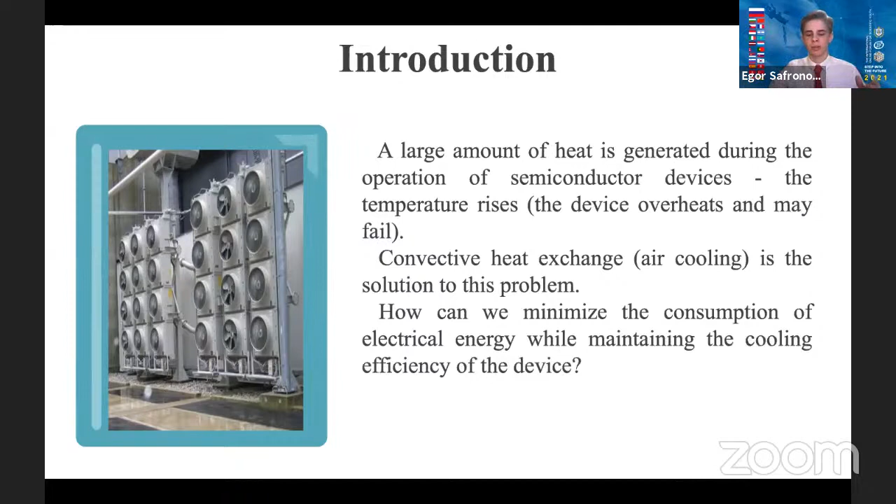The issue of energy saving in increasing the efficiency of the industry remains relevant to this day. To date, various design schemes of heat exchange have been developed for use in heating systems and utilization of air heat. Since 2010, the Russian Federation has accepted a state program for energy conservation and efficiency improvement, which will reduce the energy intensity of the Russian Federation gross domestic product. This program remains relevant at the moment.

Besides, the problems of power supply and cooling systems in corporate data centers today are faced not only by technical specialists and administration, but also by ordinary corporate users, representatives of small businesses and industry. The reason for these problems is the mismatch between the widespread explosive growth in the number of servers and storage systems with their ever-increasing performance, as well as the limited ability to implement cost-effective solutions in most data centers. Also, the question arose of the need to introduce efficient cooling systems in the industry.

Metallurgy is a great example for it. In the course of our work, the following hypothesis was put forward: the efficiency of intensification of heat exchange processes in a gas flow depends on the optimally selected blowing speed. To confirm or refute this hypothesis, we set the goal of developing an experimental setup for measuring the change in the temperature of a heated body from the blowing speed.

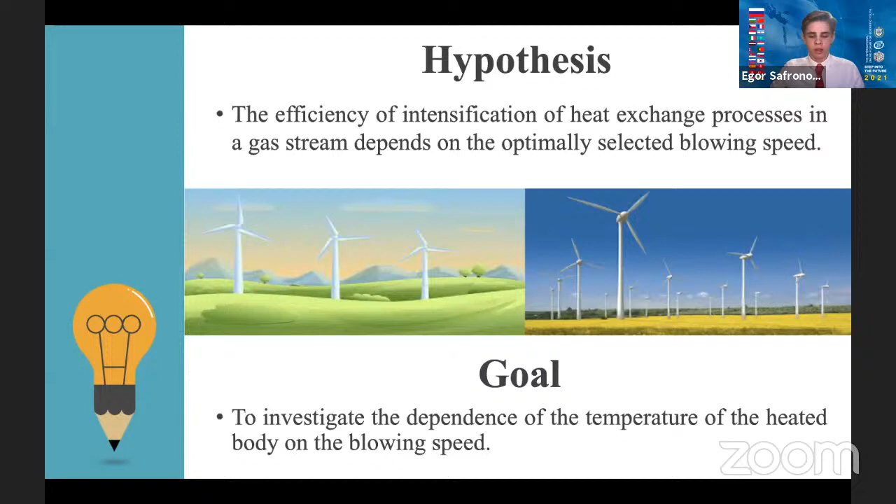To achieve this goal, we need to solve the following series of objectives. These include the creation of an experimental setup for measuring the change in the temperature of a heated body from the blowing speed, as well as justification of the possibility of applying the acquired knowledge in practice.

Heat transfer is the process of transferring heat, that is the exchange of energy. There are three types of heat transfer in total: thermal conductivity, which is a heat transfer from more heated areas of solids to less heated ones; convection, heat transfer by jets of liquids or gases; and radiation, heat transfer by means of electromagnetic waves.

The types of heat transfer without mass transfer include thermal conductivity and radiation, and heat transfer with mass transfer includes natural convection and forced airflow, which is also called forced convection. Natural convection occurs spontaneously in a substance when it is unevenly heated, while during forced convection, the material movement is due to the action of external forces, such as pump, fan blades, etc.

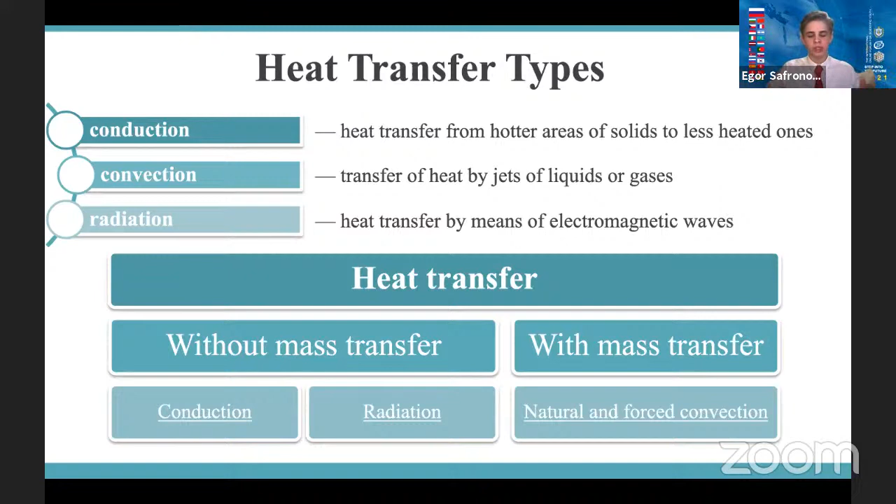Since our study refers to the intensification of heat transfer by means of blowing, let us dwell in more detail on the consideration of the theory of forced convection.

The heat transfer coefficient increases with an increase in the velocity of the medium and during the transition from a laminar to a turbulent regime of motion in connection with the intensification of convective transfer. The heat transfer coefficient is also higher for those media with a higher thermal conductivity coefficient. In most cases encountered in practice, the heat transfer coefficient is determined experimentally.

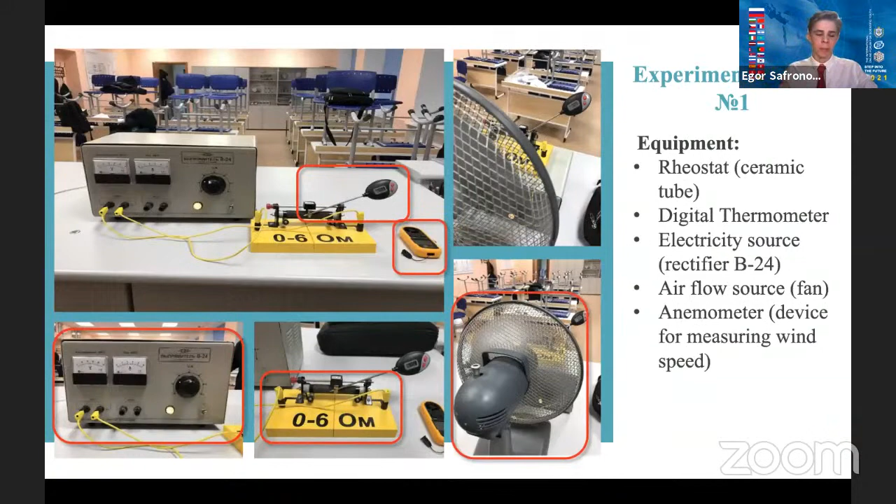First of all, we measured the room temperature equal to 22 degrees. Then we set a constant current supply to the electricity source equal to 7 volts, 7 watts, and 1 ampere.

Regardless of the increase in the blowing speed, the body, taking into account the difference in room temperature, will still be cooled to a minimum of 7 degrees Celsius. Therefore, the optimal speed for this configuration will be 4 to 5 meters per second.

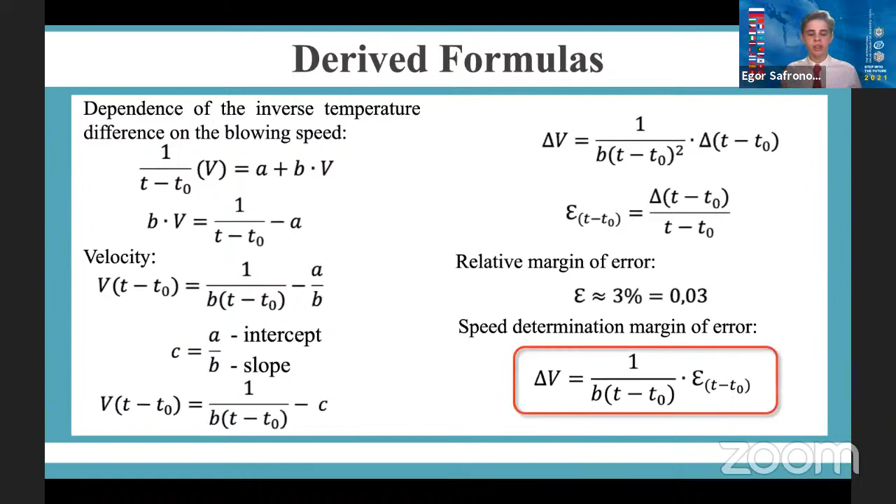Now let's derive the formulas. By transforming the formula obtained from the graph for the dependence of the inverse temperature difference on the blowing speed, and deriving the formula for the velocity, we were able to derive a formula for determining the speed margin of error.

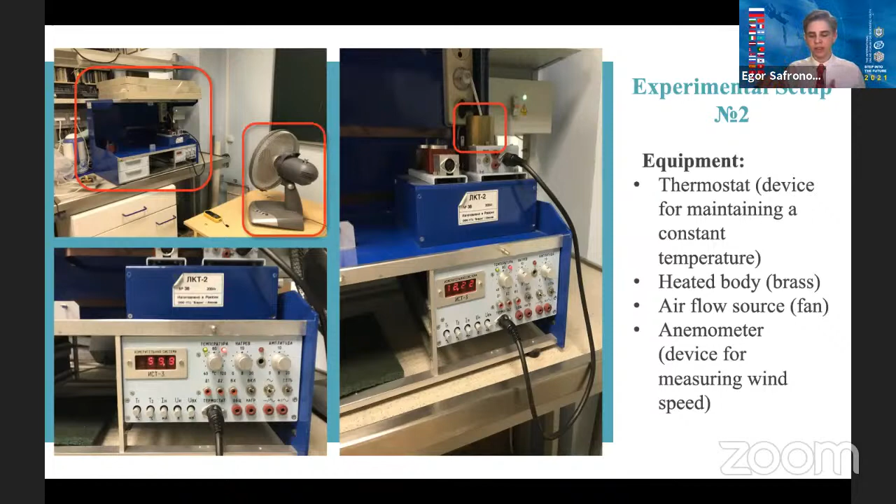The second experiment consisted of thermostating. To create the second setup, we needed a thermostat, a device for maintaining a constant body temperature, a heated body. Based on the heat conducting qualities of metals, we chose brass, a source of airflow, and an anemometer.

As a result, this gives us that for a power equal to 12 watts, the optimal blowing speed will be approximately 2.5 meters per second.

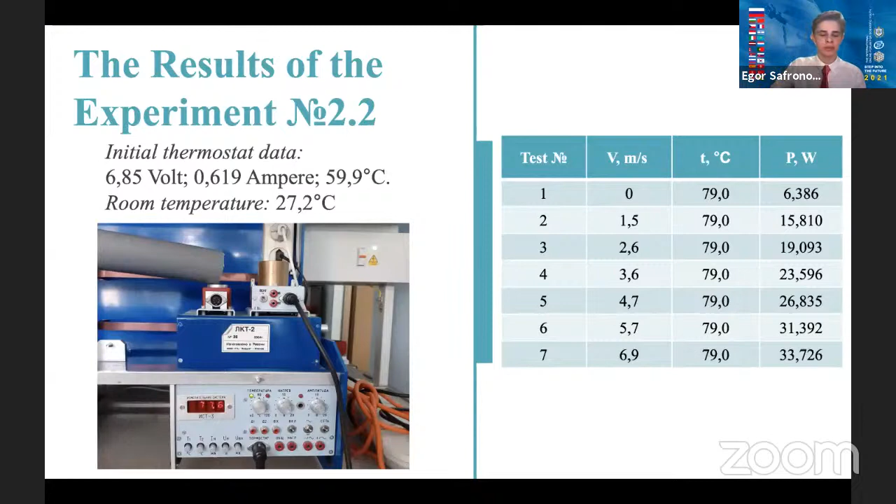Changing the temperature parameters to higher ones, a similar experiment was carried out, the results of which are presented in the table. Based on its results, a graph was also drawn up and a linear dependence of the power on the blowing speed was obtained, by which we can also easily determine the optimal speed for a given power.

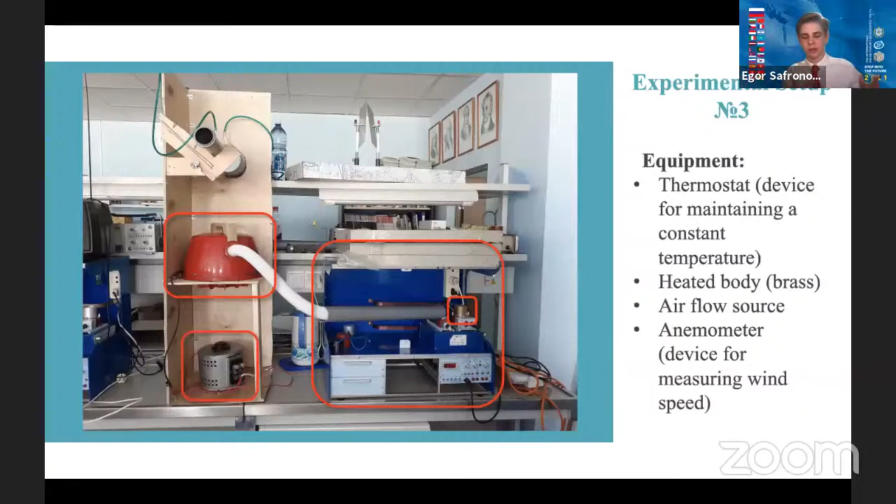Experimental setup number 3 consisted of a thermostat, a heated body, a source of airflow, and an anemometer. We constructed a separate setup for it, consisting of a vacuum cleaner operating on blowing, a linear auto transformer for adjusting the wind speed, and an anemometer. The principle of this experiment was similar to the first one.

We set constant power on the thermostat and recorded the change in body temperature under the influence of airflows of different speeds. The results are presented in the table, where we also noticed that after the 7th test, the minimum temperature changes insignificantly.

Next, we presented the results on the inverse exponential dependence of the temperature difference on the blowing speed, from which we can conclude that the optimal speed will be 6 to 7 meters per second.

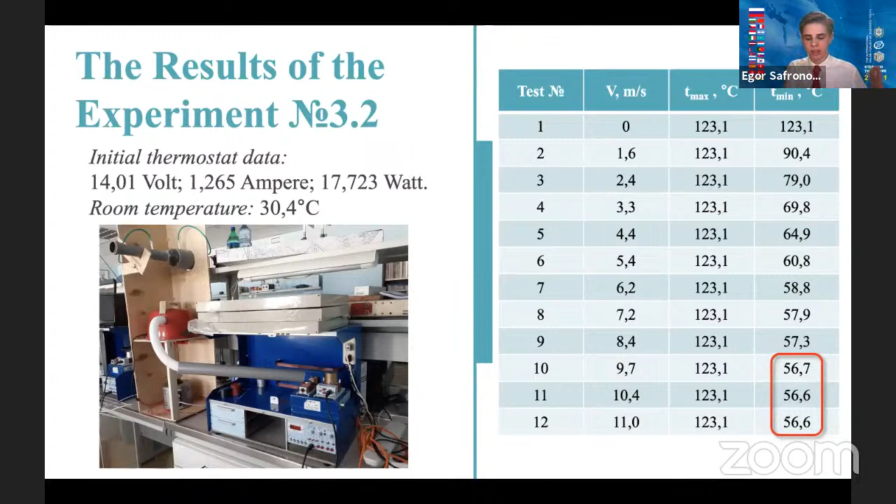The final experiment was carried out according to the same principle, while the temperature was significantly higher, 123 degrees Celsius. The results are presented in the table. However, in this experiment, only after the 10th test did the minimum temperature begin to drop slightly, and then completely stopped decreasing. From the graph, you can see that the optimal speed will be 9 to 10 meters per second. Consequently, the higher the temperature of the heated body, the higher its optimal blowing speed will be.

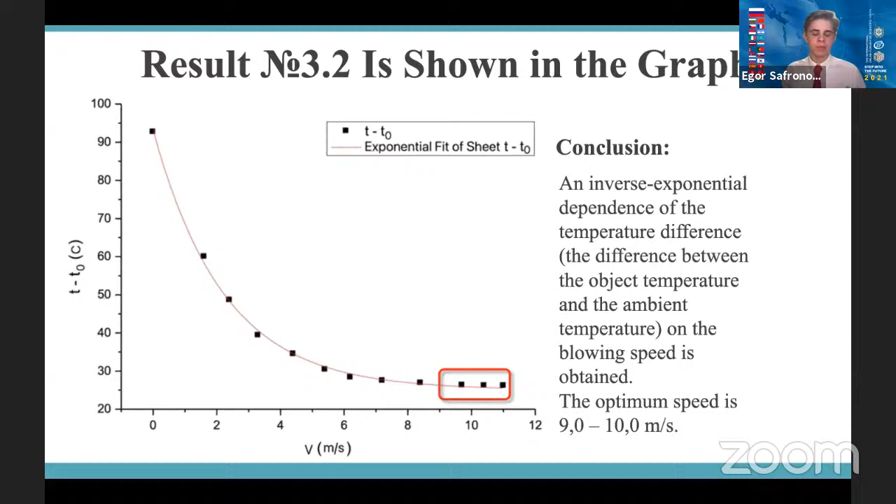Based on the results of the experiments carried out, we can safely say that the hypothesis put forward by us has been confirmed. Each of these configurations has its own optimum airflow speed. With a little effort, we can calculate this speed in order to use electrical energy efficiently without unnecessary waste.

Based on the knowledge gained, the prospects for our project are to create our own cooling unit, which will automatically adjust the blowing speed to the consumed power in order to maintain energy efficiency, as well as to compare this method of heat transfer with other current ones, such as water cooling, for example.

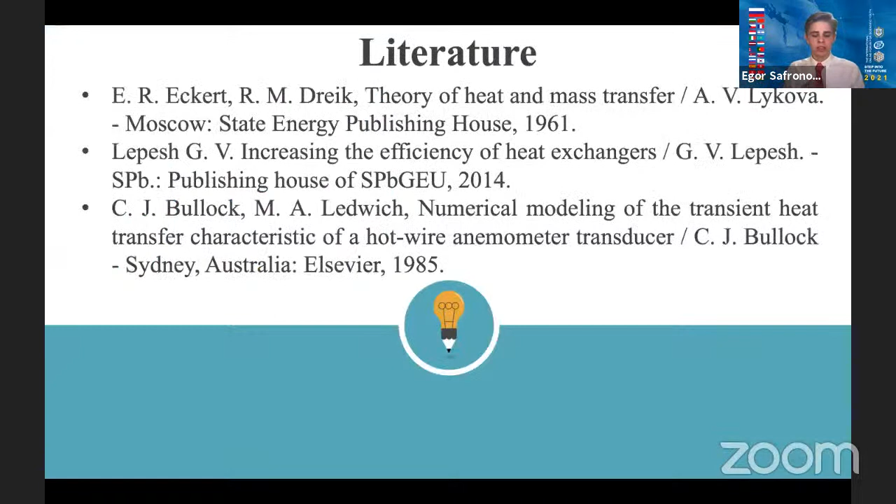Based on the results of our research and the objectives set, we made the following conclusions, presented on the slide. During our research, we used the following scientific literature. Thank you for your attention.

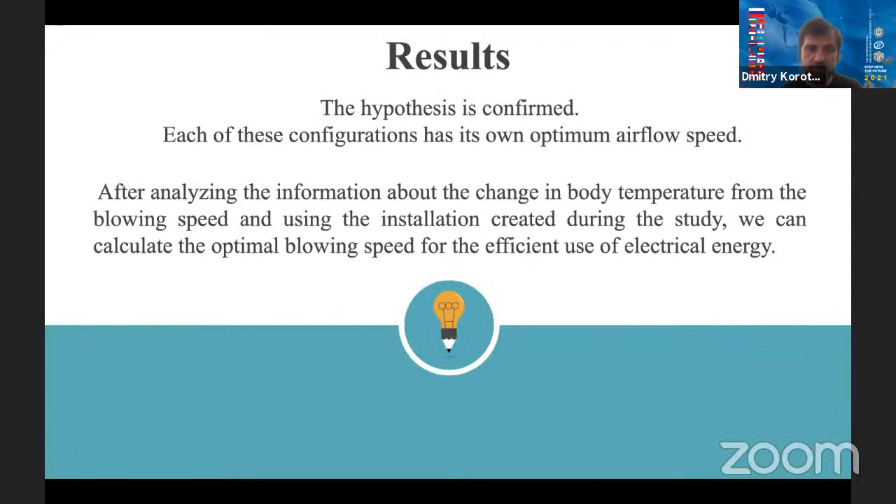Any more questions? Excuse me, could you show the slide with the results again? Yes. This one? No. With the list - conclusions, you mean? Conclusions, yes. All right, yeah.

And what do you think, is the wind or water cooling system better? As I see it, the wind cooling system is better, but I cannot tell it right away because we didn't compare them. This is, as I told you, the prospect - we are going to compare them and define which will be better for usage. Why do you think so? Because the water cooling system is hard to maintain compared to the air one.

No, by physics - about physics. Well, why do you say that the air cooling system should be more effective than, for example, a water cooling system? In terms of physics, as we understood, the convective method is a method with mass transfer. The mass from the blowing speed from the fan, for example, will cool our body better because it's easier to do for it, I mean.

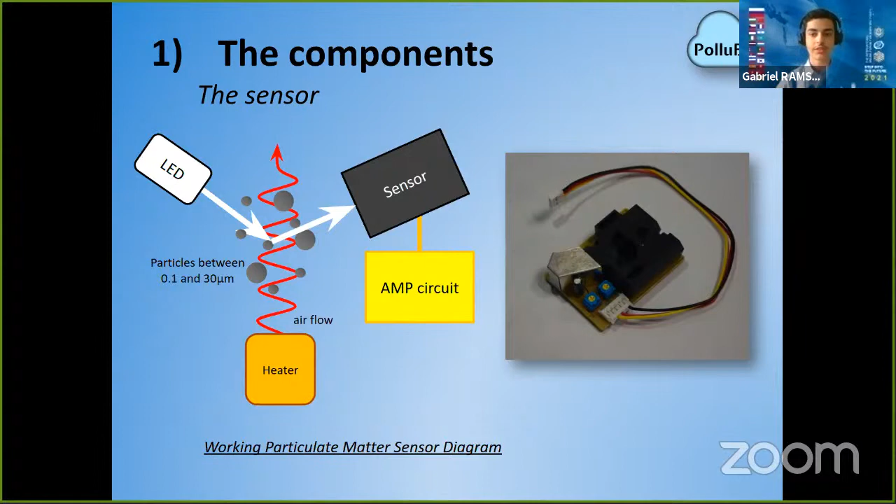Now the sensor. At first we wanted to use a NOx sensor. NOx means nitrogen oxide, gases with direct effect on health, but it needs time to warm up and the data are quite hard to use. So we changed to a dust sensor that measures particles between 0.1 micrometers and 30 micrometers.

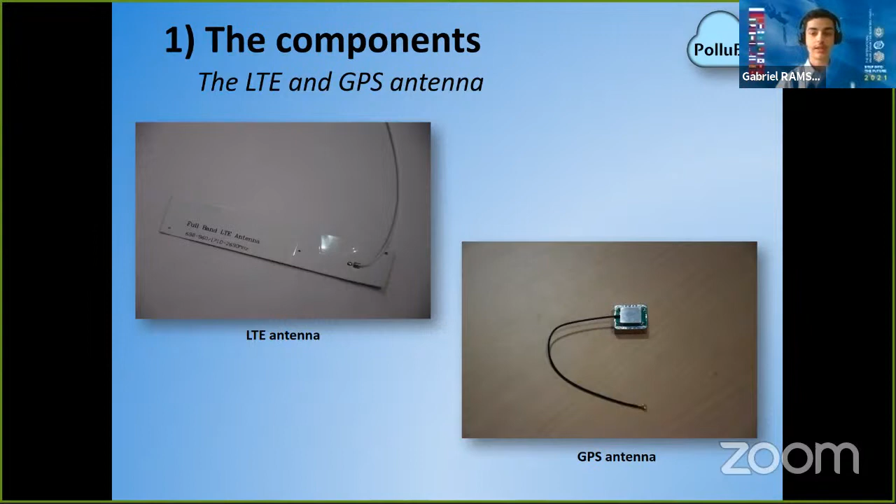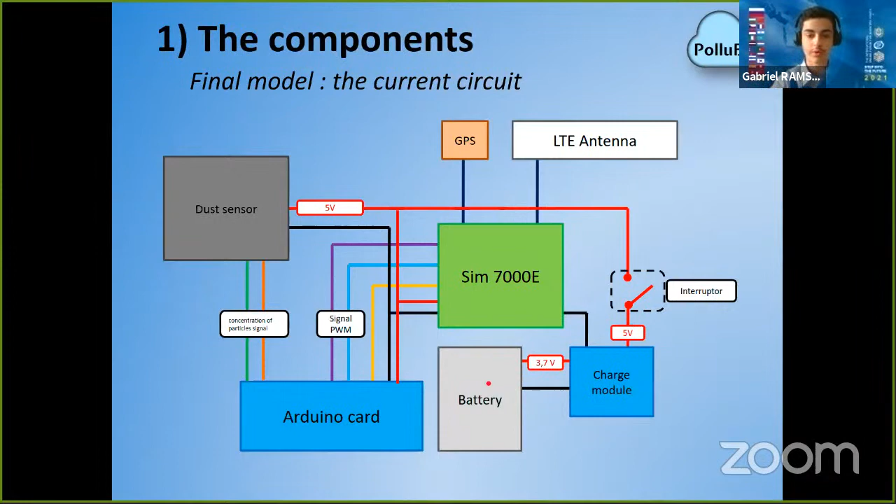Then we have the LTE and GPS antennas that are required to send the data and get the GPS localization. Here we can see our final circuit. We can observe that we also have a battery to power the circuits, and a SIM module to send the data.

Now we have all the components. We need to develop a program to use them. The Arduino program has changed a lot, but today this is what it looks like. We first define libraries, pins, and variables. Then we have the setup function that simply starts the circuit.

After that, the most important part is the loop, where we get the GPS localization. We measure the pollution of particles between 1 micrometer and 2.5 micrometers. We convert the data since the sensor does not use a classic unit of concentration, and we must convert it into parts per million, ppm. Finally, we send the data to the server at the end of the code.

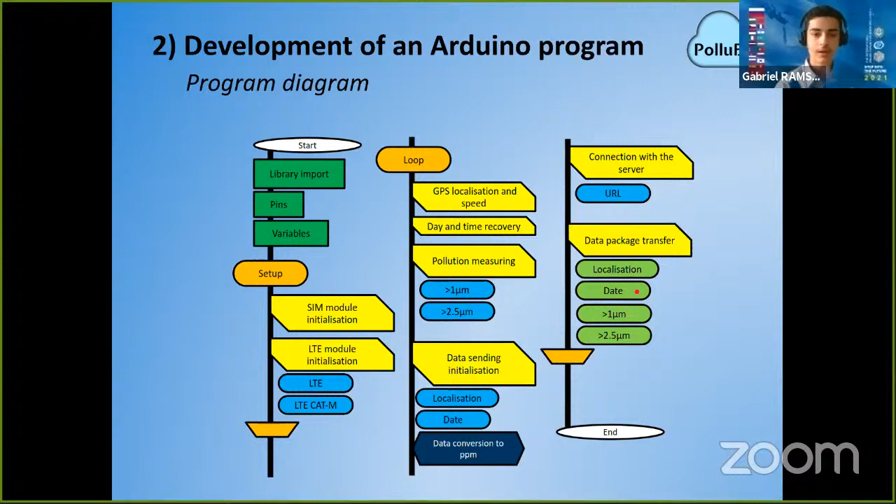Now we can measure the pollution. We need to put our components on a bike. At the beginning, the case was just a box that contained the components, and it was not really aesthetic. So we designed another case with the shape of a cloud that reminds us of the pollution topic. But as you can see, it's really big and it's quite impossible to put on a bike.

Therefore, after much research, we developed the current case that keeps the shape of a cloud, but can easily be put on a bike.

Now we are able to get information about the pollution in the streets. We need to inform people about that. We are currently using dots on a map. The color of the dots is fixed between green and red, according to the concentration of particulate matter and the air pollution scale. It's also important to know that a Polybike sends the data corresponding to a dot every 30 seconds.

But we still have a problem: the background map is supported by Google Maps, and we would need to pay for it if we use it beyond personal purposes. Therefore, we changed to an open source map called OpenStreetMap.

With our 4 Polybikes, we have succeeded in getting a lot of data. Today it's more than 50,000 lines of data, corresponding to more than 2,500 kilometers on bikes. And for this, we have done many tests.

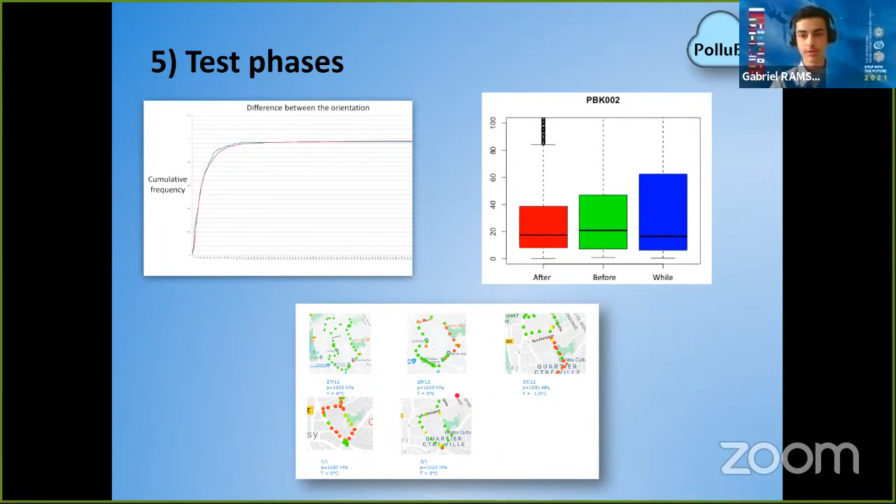We have done many tests, such as the Kolmogorov-Smirnov test, which allows us to show that the orientation of the Polybike does not matter. We are also able to compare our data, such as before, during, or after the lockdown, or according to the weather. Moreover, the tests allow us to make improvements, such as adding a condenser or moving the antennas further away.

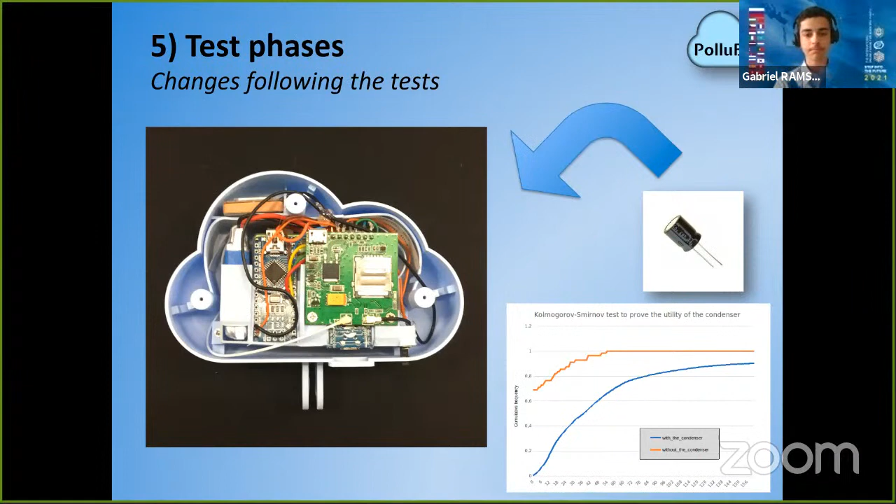Now our next objective is to increase the number of Polybikes in order to cover the whole city of Massy. But if we have a lot of Polybikes, that could create a real mess with too many dots. Therefore, we need to refresh the map. But the question still is, what is the best delay to refresh the map?

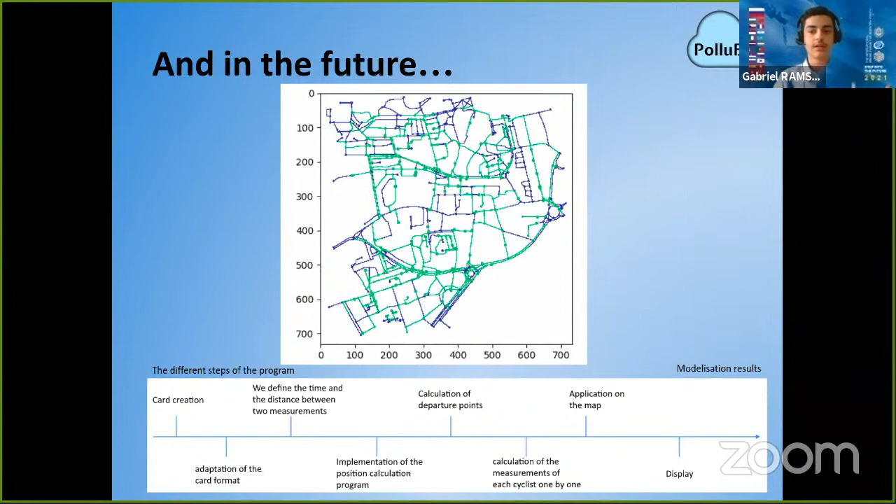So we built a Python code that models the movement of 100 Polybikes in the city of Massy. This program showed that the best delay to refresh the map is 15 minutes.

But we also observed that the colored dots on the map weren't really practical, so we thought about a way to give directly to the user the best itineraries in terms of pollution and distance. To do so, we first represented the city as an Excel table, with each cell representing a street with a pollution score. Here we have put 1, 2, 3, but it could be 1, 5, 9 - we need to fix it.

After that, we thought about different itineraries, and we showed the best one depending on the cost, which is the sum of the pollution score of each street traveled. But we needed a code if we wanted to use that instead of dots.

Consequently, we built a Python code that uses the Dijkstra algorithm with a matrix. We recover the matrix from OpenStreetMap, and we add the pollution into our calculation with the previous work.

We can give the user the best itineraries. All in all, we have succeeded in building a working device that can measure the air quality in the cities and make people aware of the best itineraries to achieve their travel. Now we want to find someone in the Paris-Saclay cluster, or maybe a startup company, that could take care of the industrialization and distribution of the polybike. And we hope to see a lot of polybikes in our cities one day. Thank you for listening to me.

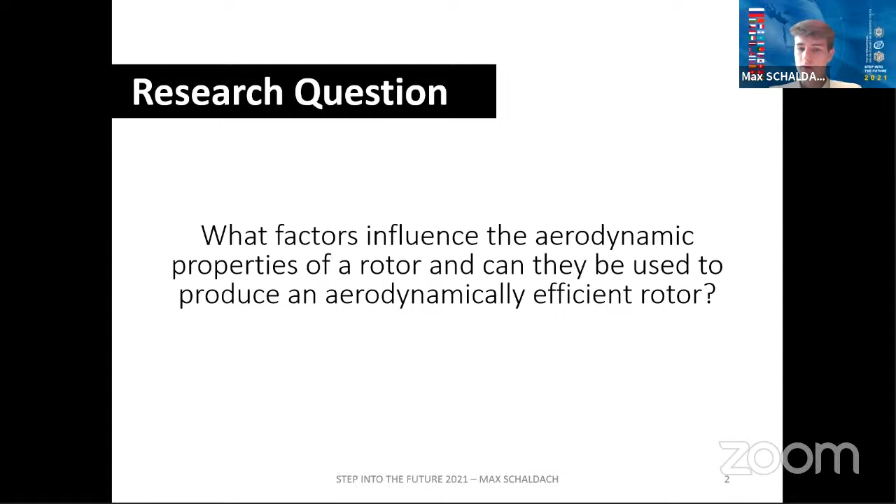To come to the answer to that question, I based my research process upon the laws of the propeller theory by Betz and Schmitz. That theory contains a fundamental idea which states that an ideal rotor has a homogeneous distribution of the lift force acting upon it. Why is that so important?

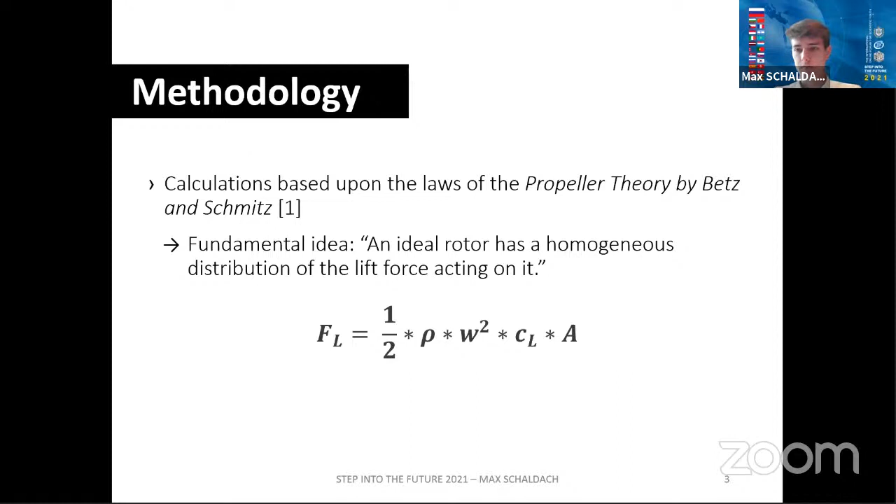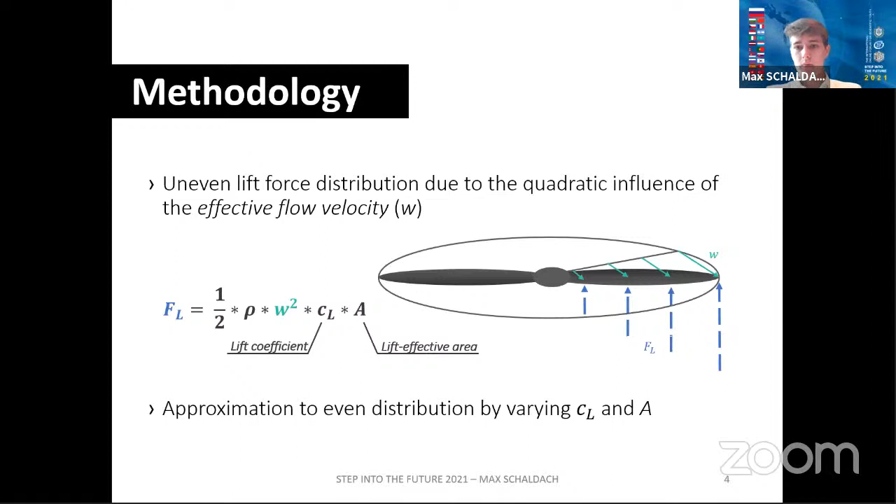However, looking again at the lift equation, we see two other parameters we could potentially vary: the lift coefficient CL and the lift effective area A. By varying them, I was able to approximate a more even distribution of the lift force. The first step was to choose suited airfoils, because varying the airfoils varies the lift coefficients. So using different airfoils for different parts of the rotor enables us to achieve a more homogeneous distribution of the lift force upon a rotor blade.

I used 3 different airfoils in total that I extracted from a public database called airfoils.de, and then exported their airfoil coordinates into Excel, where I modified them using the parameter called airfoil depth L. That airfoil depth is used to stretch airfoils relative to their distance from the blade root, and as you can see, it is part of the lift effective area A. So by stretching them more at the blade root than at the blade tip, there is more lift effective area at the blade root, and thus again we've gained a more even distribution of the lift force upon the rotor blade.

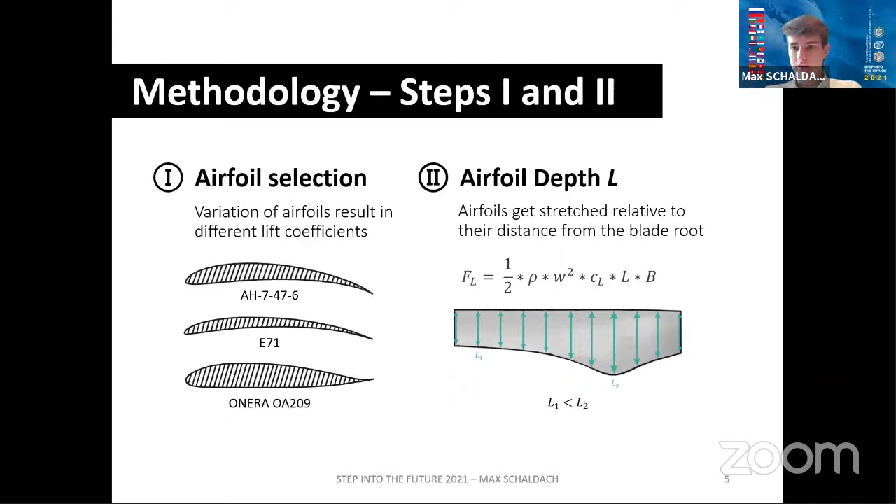The third step was modifying the airfoil coordinates using the so-called construction angle alpha K. That construction angle is used to align the airfoils parallel to the air inflow direction, because that varies heavily from the blade tip, where it's almost horizontal, to the blade root, where it's almost vertical. Aligning them parallel to the air inflow direction means there's less drag-effective area, and reducing drag gains aerodynamic advantages. The construction angle alpha K is made up of two other angles, the angle of attack alpha A and the angle of incidence alpha E, but due to time reasons I won't go into detail about those in this presentation.

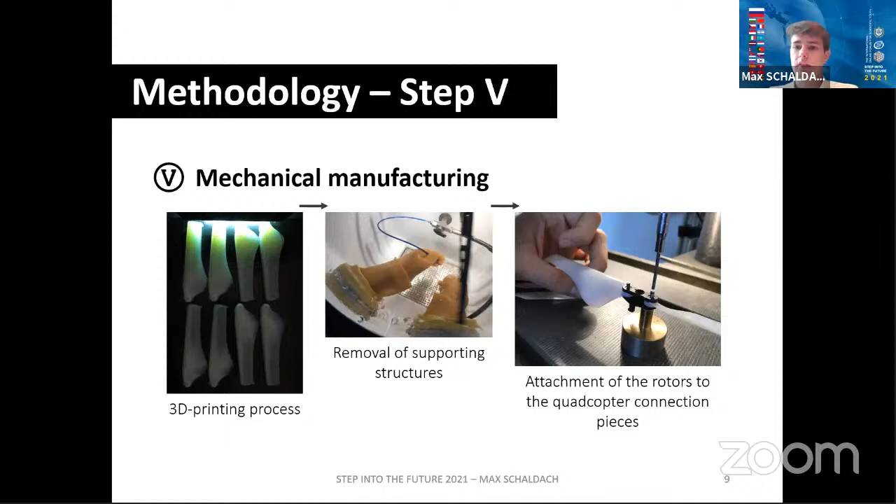For the second prototype I constructed, I additionally attached winglets to the blade tips of the rotor blades, though I'll explain the reason for that later. After that, I exported the 3D model into a 3D printing software using a PolyJet printing technique, removed the supporting structures from the printer, and attached the rotors to the quadcopter connection pieces, ready for test flights.

That's why I then attached winglets to Design 2. The basic idea of winglets is that you have a high pressure region under the rotor blade and a low pressure region above it. This creates a cross current around the blade's tip when the rotor turns, and that cross current produces little whirls which generate drag. Putting a barrier on the blade tip in the form of winglets reduces that drag force.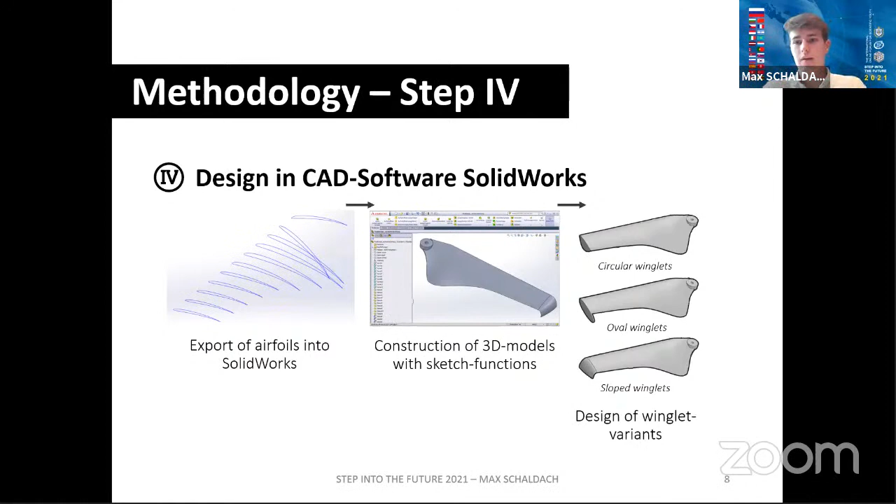That was the basic idea with the first two winglet designs. The third design I call the sloped winglets. My thought was that due to the round, sloped form of the winglets, they not only prevent drag force but also produce additional lift force, because they accelerate air towards the ground due to the law of conservation of momentum—meaning there's a counter momentum, which is nothing less than lift force. So: A, it reduces drag; B, it generates a bit of additional lift force.

Going into these results in more detail, the significant improvement from Design 1 to Design 2 is mainly due to differences made in the construction process. For the airfoil selection, for example, I created a criteria catalog for Design 2, so I didn't choose the airfoils randomly or by heart, but had an actual tactic for which parts of the rotors would use which kinds of airfoils.

For the following steps, namely the calculations, I learned from the experiences of Design 1, and those became more precise as I constructed Design 2. I also made some minor deviations in SolidWorks, mainly with the connection pieces for the quadcopter. So those are the major reasons for that improvement.

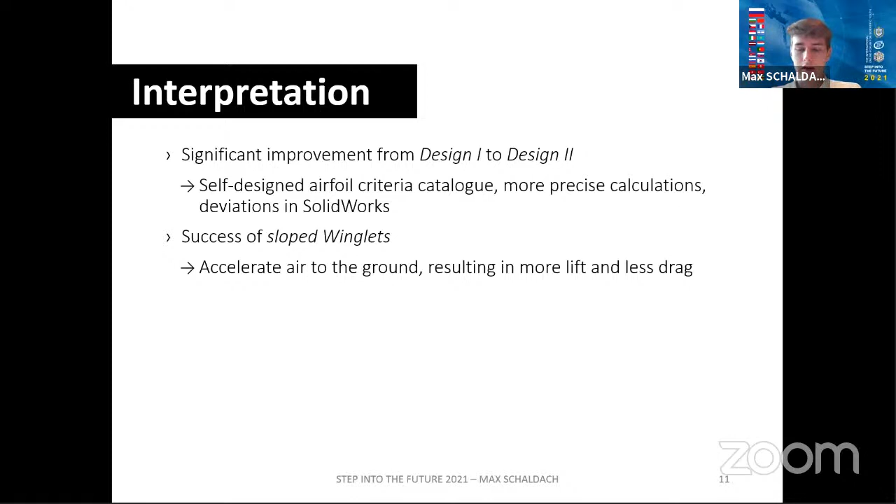Coming back to the original research question: we now know that of primary importance to the aerodynamic performance of a rotor is the selection process of the airfoils, the calculation of the two parameters—namely the construction angle and the airfoil depth—and the design of winglets.

Using those points, I developed a total of 5 different rotor prototypes over a period of about one year. As shown before, one of these prototypes, Design 2 with slope winglets, ultimately succeeded in outperforming the design of the quadcopter company DJI in terms of aerodynamic performance—namely the ratio of lift force to rotational rate. Thank you very much for your attention.

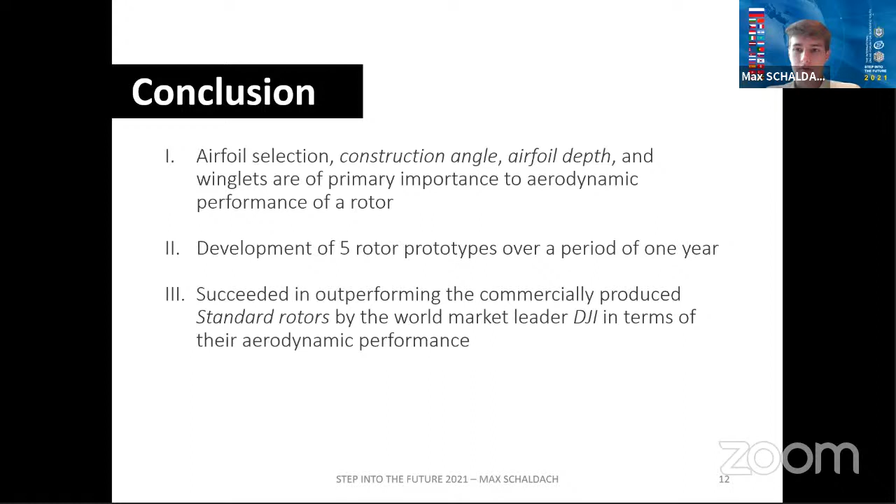Thank you for the good work. I have one question. Why did you choose as a criterion for aerodynamic performance the rotation rates of the rotors, without the power and without any other characteristics? Why did you make this choice?

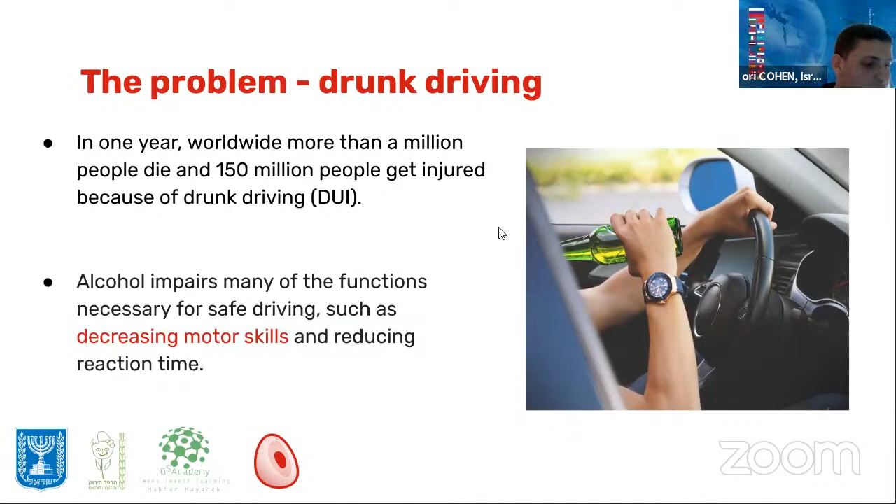Alcohol impairs many of the functions necessary for safe driving, such as decreasing motor skills and reducing reaction time. In Russia, the annual mortality rate from DUIs is the highest in Europe, with around 300 deaths per million capita per year, approximately 43,000 people. Today, the most effective device designed to prevent drunk driving is the breathalyzer, which is non-sterile and an easy-to-cheat solution.

Drive Alive by Litchi is a revolutionary way to prevent DUIs. What is the product exactly? Our product is a fingerprint-based lock for the car's engine and immobilizer. The lock prevents the car from being started at all if the driver is drunk.

The device consists of two main sensors: a spectroscopic sensor and a fingerprint sensor. The spectroscopic sensor enables determination in a non-invasive way of whether a driver is drunk or not. If they are, the immobilizer locks the engine and prevents them from driving, while displaying on a small screen the estimated amount of time until the driver will be sober again.

The device is based on infrared light, so it's very efficient and extremely accurate. We found out that the accuracy level is around 99.99%, as we're going to show later. The fingerprint sensor identifies the driver's identity and protects the car from theft, adding to the overall amount of security the product provides.

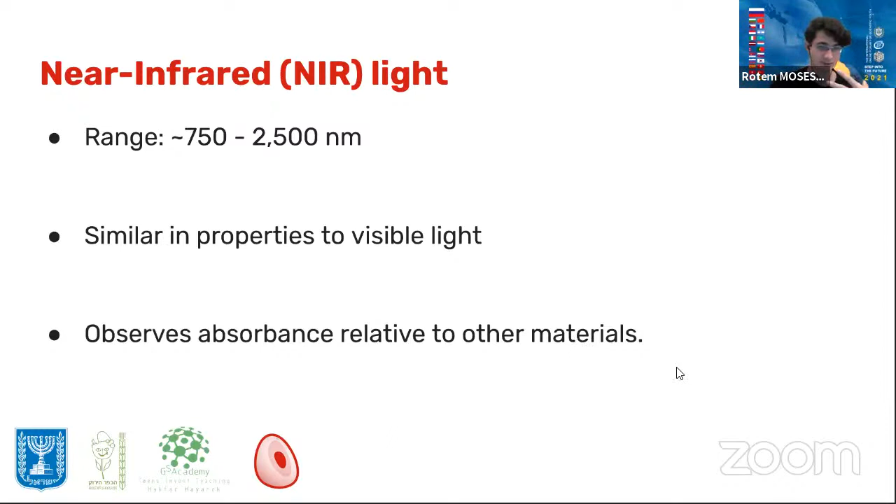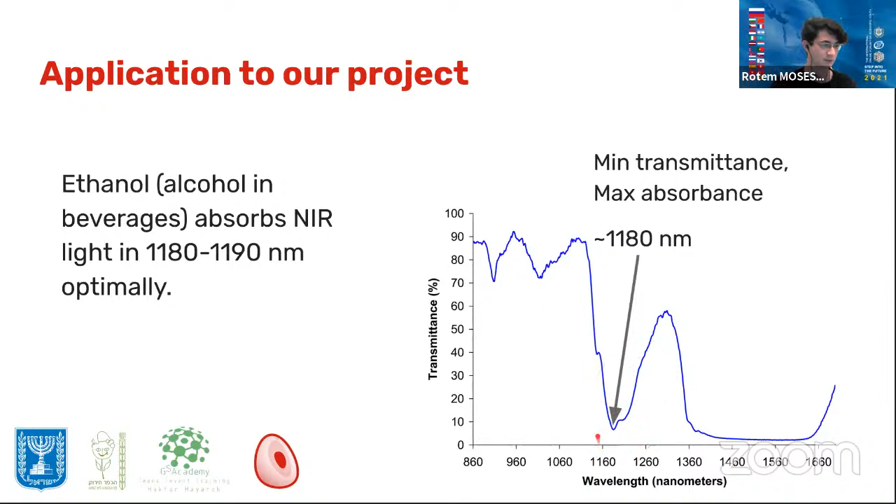We have seen in our research that ethanol, the alcohol in alcoholic beverages, absorbs near infrared light optimally around 1180 to 1190 nanometers. Here you can see the full graph from our research, with the peak, and here's a close-up showing the exact level of maximum absorbance.

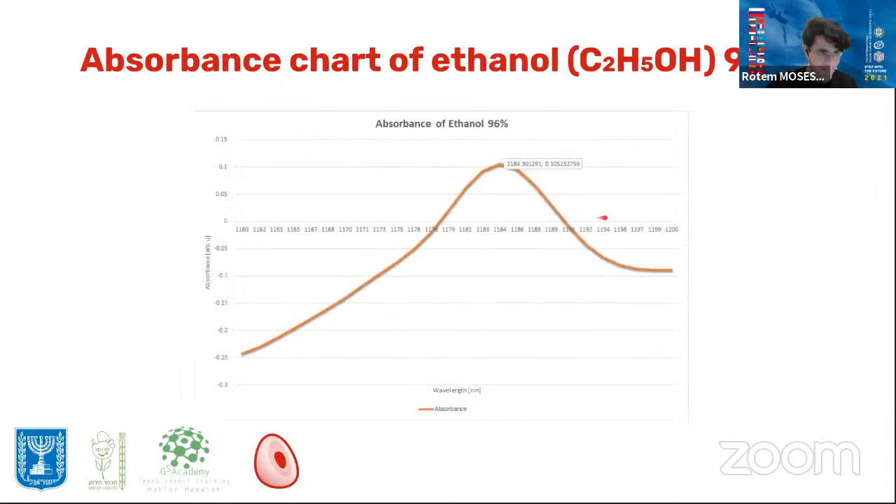We have also checked the feasibility of such a product, and we've seen the following: fingerprint immobilizers for cars already exist today in the market, and for the spectroscopic sensor, Samsung uses very similar technology in smartphones to check blood oxygen levels, using different wavelengths. Therefore, if you combine those two technologies into one product, we can create a very safe and secure ecosystem.

Okay, so now I'll talk with you about our prototype we built. To prove our product's concept, we've developed a working prototype that determines if someone is drunk or not. We also conducted experiments in lab scenarios at Tel Aviv University, which we will talk about later.

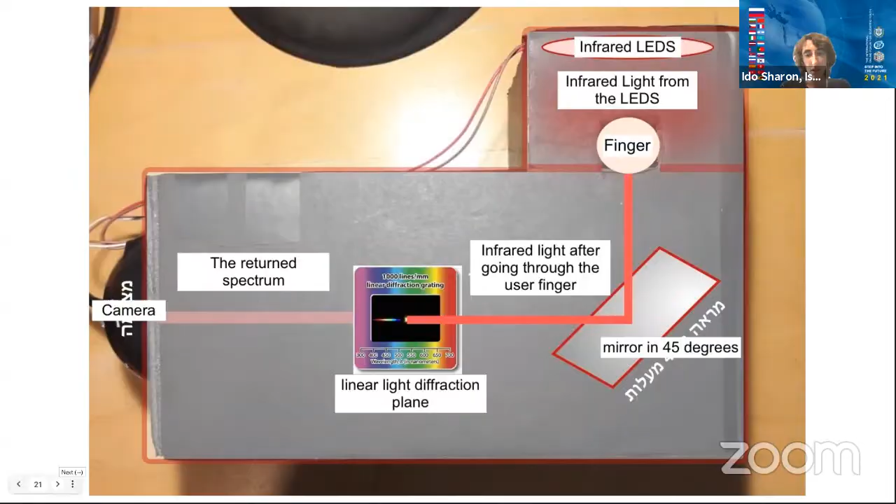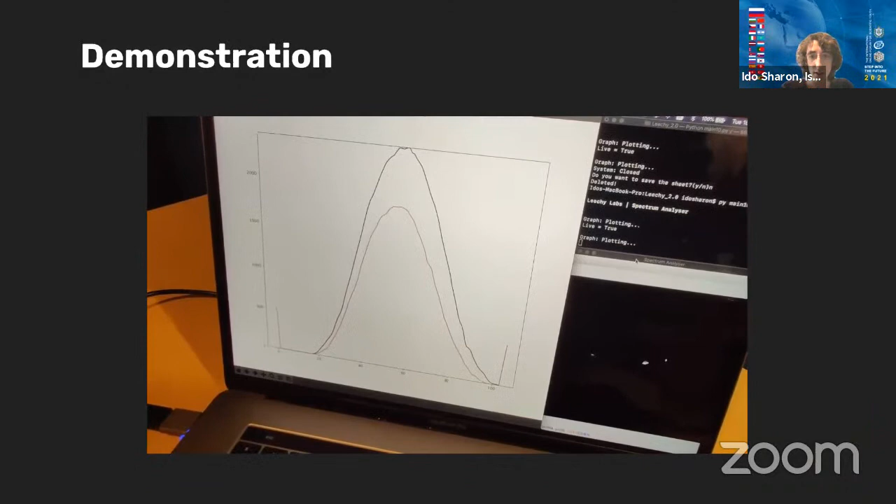It's important to say that the amount of alcohol in the alcohol gel is much higher than the one in an alcoholic drink, so we can definitely separate it from real ethanol in the blood.

Our algorithm works like this: after we get the image from the camera spectrometer, the program is adjusted to find the diffraction of the infrared light. The code knows automatically to lock onto it. After we get the cropping of the light diffraction, we can slice it into parts which represent different wavelengths of the infrared light. The x-axis represents the index of the slice from left to right, not the wavelength, but those are dependent on each other. The y-axis is the slice's average brightness, representing its light intensity, as you can see in the next slide.

Now let's talk about our research process. Okay, so after building our own prototype and proving our product's technology works, we wanted to take it to a new level and get academic approval. We reached out to the Faculty of Engineering at Tel Aviv University for more accurate and deeper research.

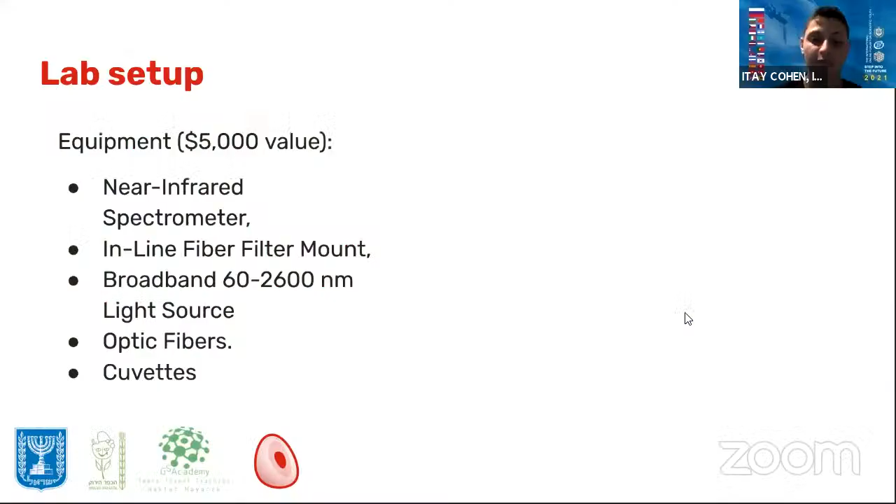After raising $5,000, we bought the professional tools we needed, which include a near-infrared spectrometer, an inline filter mount, a broadband 60 to 2600 nanometer light source, and optic fibers. Then we set up the workspace in our fully equipped lab at the university and started our research with the Faculty of Electrical Engineering, with the guidance of Nadav Arbel, MSc, and Professor Avishai Eyal.

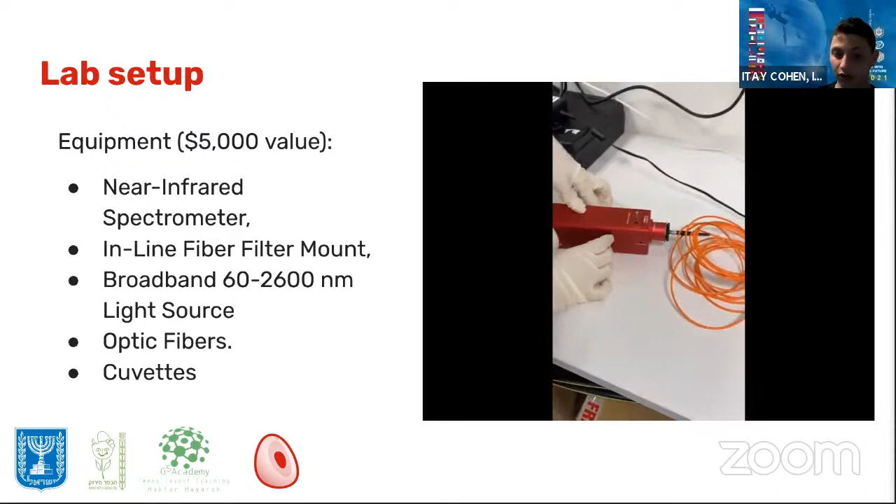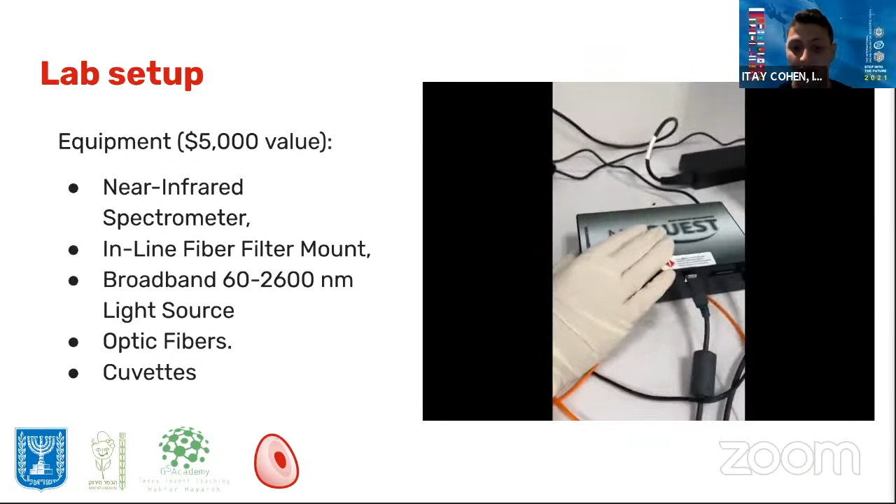For the first round of experiments, we took measurements with different amounts of ethanol percentage and distilled water. We started with 96% ethanol and split it like this: the first test was 96%, then 48, then 24, and so on until 6%, and of course the reference test of pure distilled water. Every data point is an average of 50 measurements, measured automatically using the software we use, Ocean Optics.

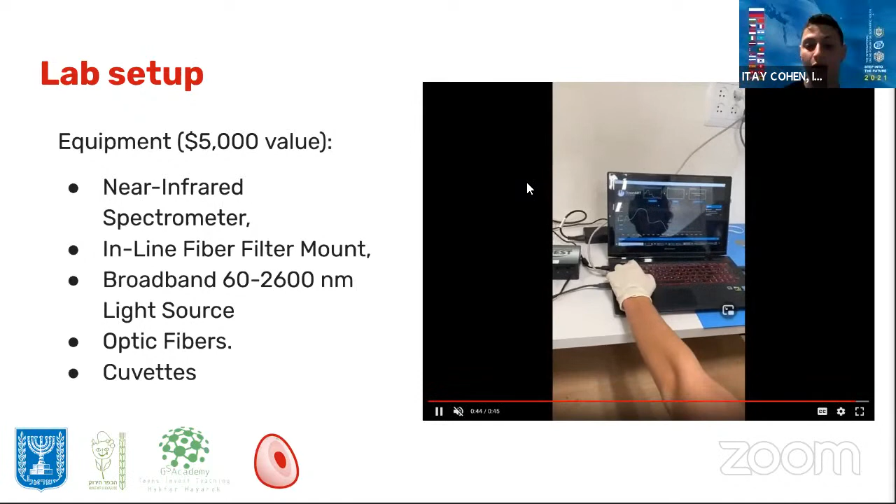After conducting two sessions of tests, we came up with very promising results that ratified our theory. First of all, we can clearly see how the ethanol affects the absorbance of the return spectrum, and that the gap between each concentration intensifies with each step, forming an exponential growth of light absorbance. In addition, we found that in the vast scale of infrared wavelengths, the best for ethanol's light absorbance is 1180 to 1190 nanometers, like we found in the previous test.

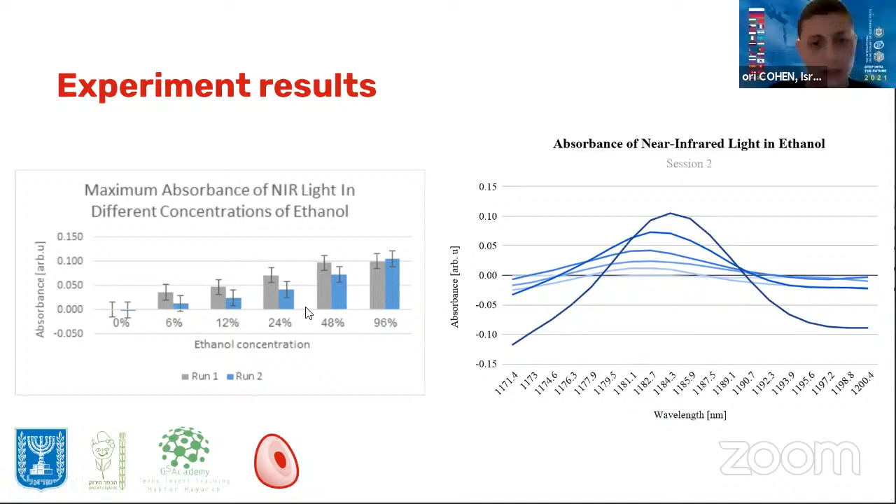Now, with the use of more accurate tools, we were finally able to get a starting demo of a functioning algorithm that will be used in the prototype of the immobilizer. Here you can see the results — this is from the more accurate experiment with Tel Aviv University and the Faculty of Engineering.

Now let's talk about the future. We want to actualize this idea. So after we submit our research in cooperation with Tel Aviv University, we plan to move forward on making a legislated patent. After that, with financial help from the Israeli Ministry of Education, we will work together with a private development company for product design and also create our first complete device. And from there, the sky is the limit for us.

Thank you very much. And remember, it's not our product, it's about your life. It's your life.

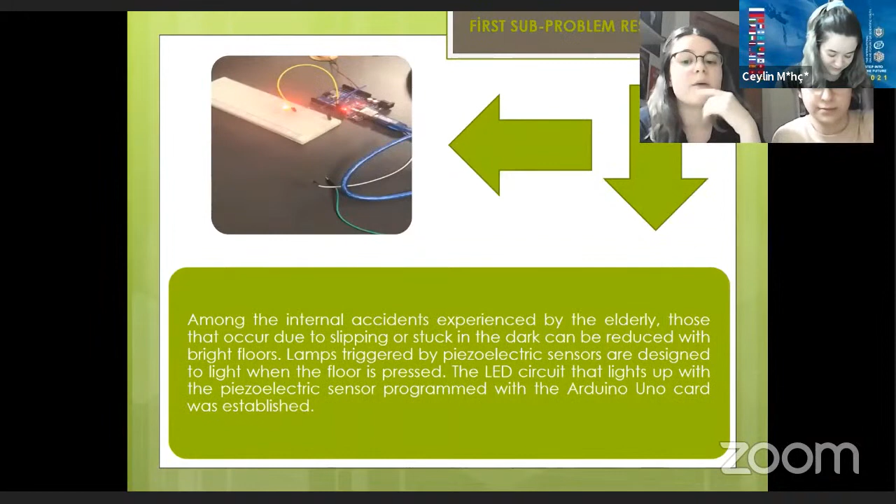Among the internal accidents experienced by the elderly, those that occur due to slipping or being stuck in the dark can be reduced with bright floors. Lamps triggered by piezoelectric sensors are designed to light up when the floor is stepped on. An LED circuit that lights up with the piezoelectric sensor was programmed with the Arduino Uno card.

To determine precautions, a sample model in which the entire floor contains piezoelectric sensors was designed. When 4 piezoelectric sensors under pressure are connected in series with 2 LEDs in front, the light turns on for 5 seconds. Thus the floor stays bright until the next step, with the light continuing to move along the path. In this way, an environment lights up selectively instead of constantly keeping the lights on inside.

For the system design to be placed in a building under construction, piezoelectric sensors are positioned under the floor, covered with strips made of foldable material such as parquet or tile. For the portable application developed for use in existing buildings, the bright floor is covered with a parquet-like material design.

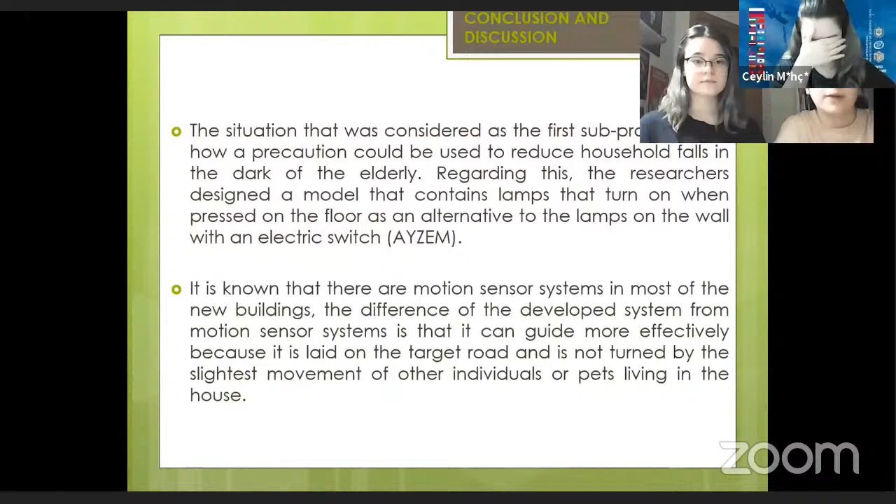The first subproblem considered was that this precaution could be used in elderly households in the dark. Regarding this, the researchers designed a model that contains lamps which turn on when pressed on the floor, as an alternative to wall lamps with an electric switch.

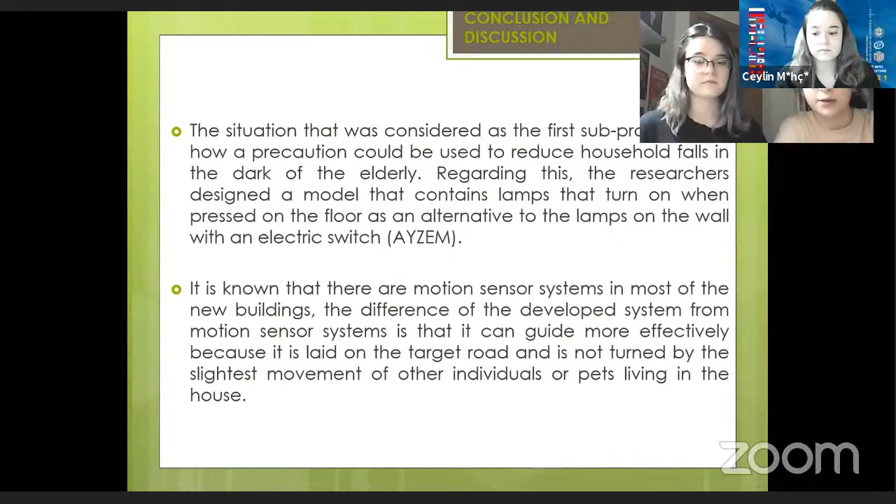It is known that most new buildings have motion sensor systems. The difference of the developed system from motion sensors is that it can guide more effectively because it is laid on the target floor, and it is not triggered by slight movement of other individuals or pets in the home. In this direction, it was decided that the sensor used on the ground would be a compression-sensitive piezoelectric material, and the system was designed with the piezoelectric sensor.

After getting this result, the second sub-problem began: how the floor as a whole can be designed with this technology, requiring that the developed system can be used not only on room floors of newly built buildings but also in every existing house, which created the third sub-problem of the study.

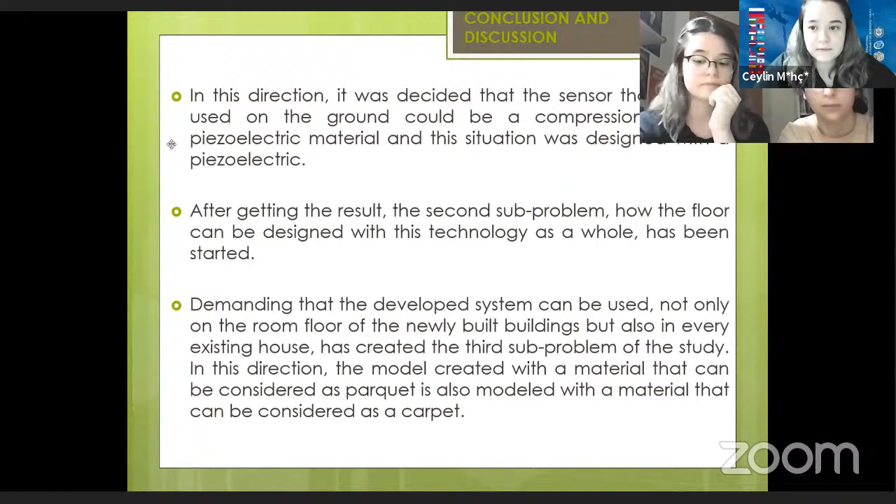While every age group is used to night lamps that are constantly on all night until their path becomes dark, children around the age of 3 whose night sleep is often interrupted can easily reach their mother's room when they wake up.

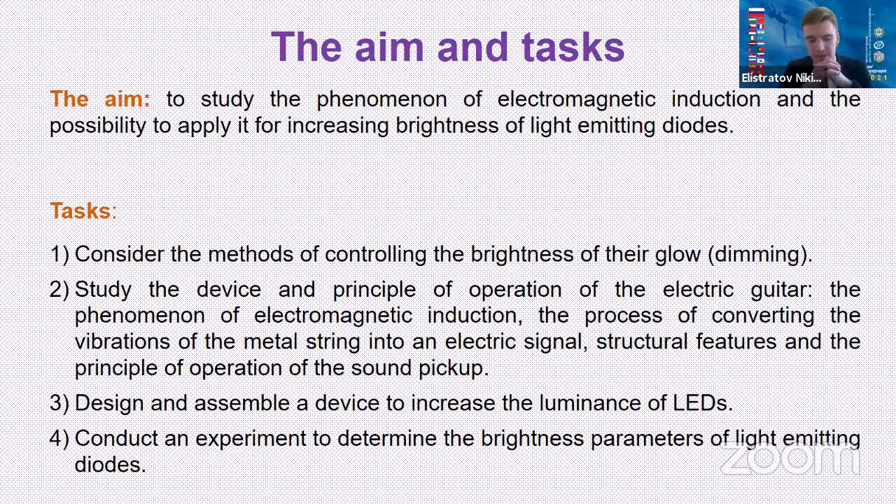Tasks you can see on the slide. Also, research methods you can see on the slide too, just a little bit of formality.

As you understood, the idea is based on the working principle of the electric guitar. This idea is based on two basic principles: first, you need to catch the signal; second, you need to strengthen that signal.

A pickup is the device used for catching the signal. There are two types of magnetic pickups, singles and humbuckers. In general, a pickup is a coil with a magnet inside it. So when the metal string fluctuates in the magnetic flux, an induction current appears and it goes to the amplifier, which is a device used for strengthening the signal.

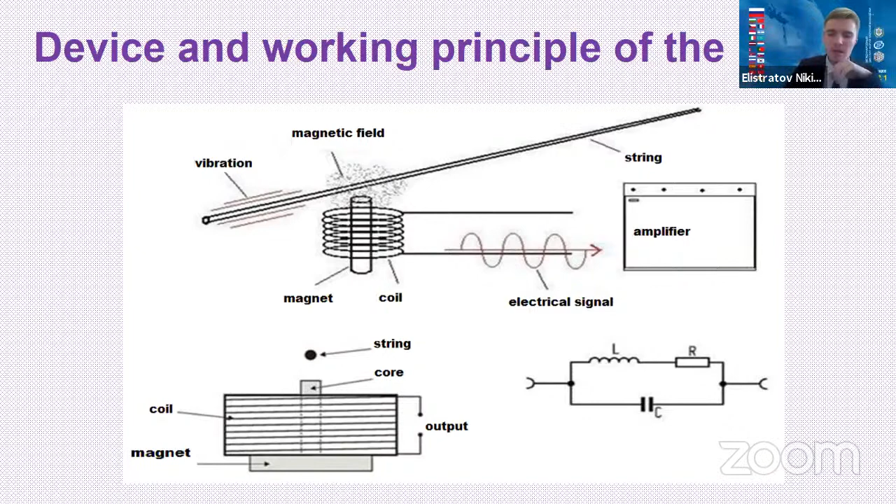After the amplifier, the signal goes to the speakers and we hear the characteristic sound of an electric guitar. As amplifier, we used a silicon transistor NPN.

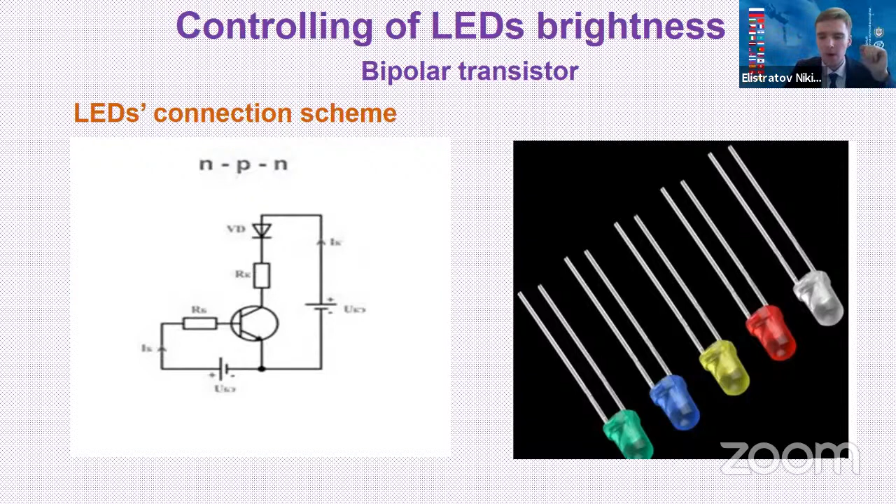Now I'll show you a video where you can see how the guitar works when connected to speakers. Sorry in advance because I have no ear for music.

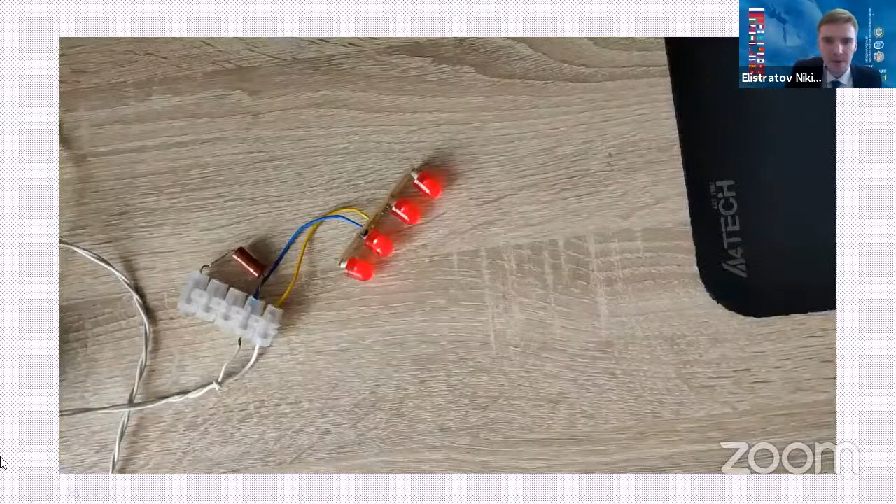I hope you have heard it. But then we thought, what if instead of speakers, we put light emitting diodes in the output? So that's what we have. You will see that at the beginning of the experiment, the diodes are shining, but when we start playing, they shine brighter. Just watch, you'll understand.

It is so because a light emitting diode is a device that works on the average amperage that goes through it. At the beginning of the experiment, amperage is about 200 milliamperes, so the luminous flux is a bit less than 300 lumens. But when we start playing, the amperage increases, and that's why the luminous flux increases too, becoming more than 300 lumens.

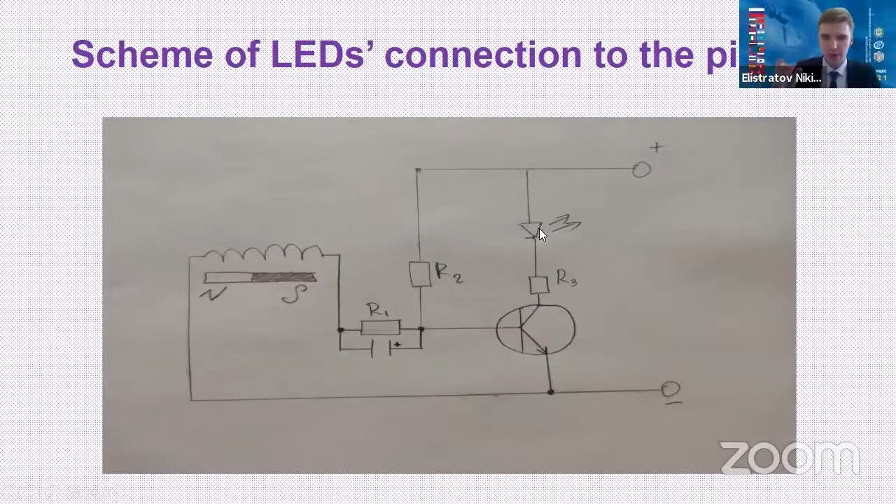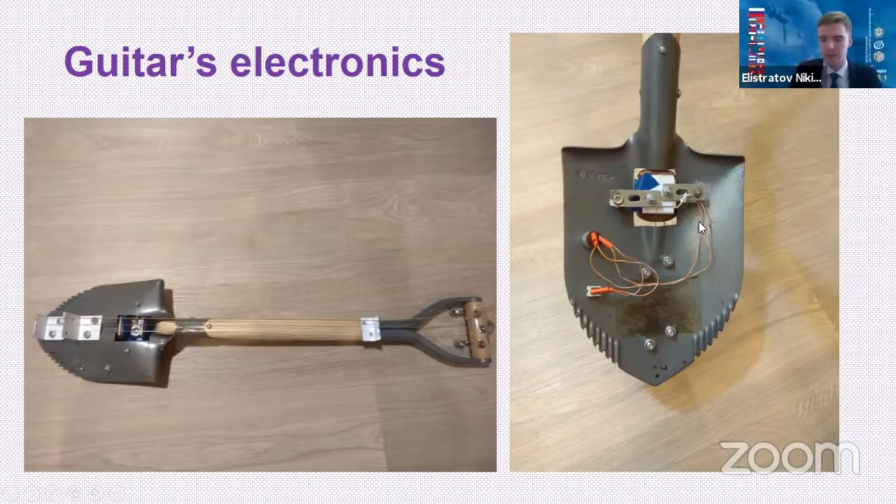Well, here you can see the design and technology. I just want to say that everyone can make this thing at home. There is nothing hard, but the only problem is to find the body for the guitar, because the shovel we've chosen is used for finding mines, so it's almost impossible to drill holes in it.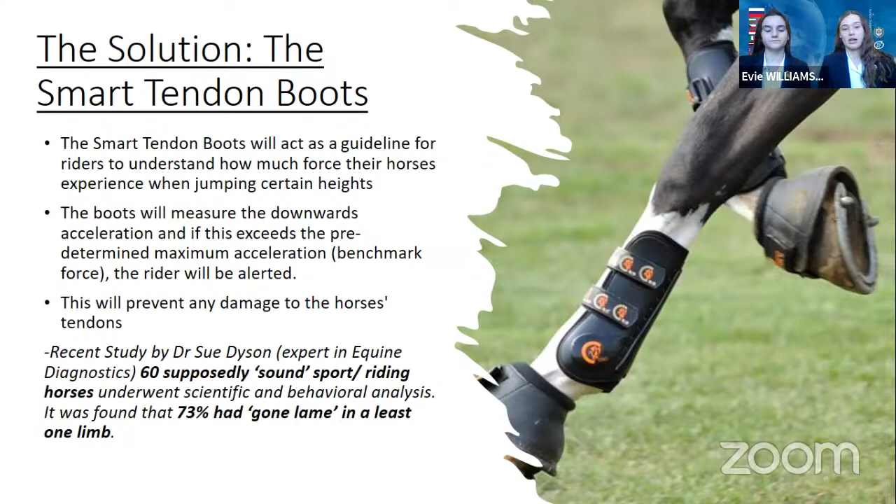Another thing that amplifies this problem is that a lot of riders do not realize when their horses go lame or are injured, because injury can be very small but can build up over a certain period of time. We can see that in the statistic below, where 60 sport and sound riding horses underwent scientific analysis, and it was found that actually 73% had gone lame, meaning that riders just cannot pick this up by eye.

The way this will work: it will use a MEMS accelerometer, which will constantly measure the acceleration it experiences. There will also be a microcontroller, which will be collecting the accelerometry data every millisecond, and it will find the moving average over 0.1 seconds - though this could also be over 0.2 seconds. This is just to save storage and have a better understanding of how much force your horse is experiencing.

The current value of the moving average is then sent to the HC05 Bluetooth module every second. It's then compared with the most recent maximum acceleration, and if it is larger, it's immediately sent to the Bluetooth module so you don't have to wait for this moving average. The Bluetooth module is also paired with a mobile app, which collects the data from the microcontroller and will alert the rider if the maximum acceleration has exceeded the predetermined benchmark value.

Over here we have a schematic diagram of the prototype in partnership with De Montfort University.

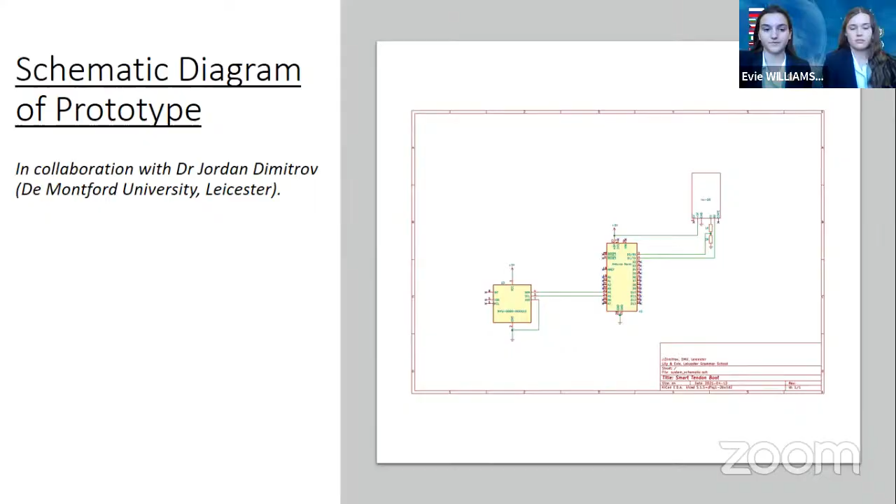We also have a video demonstration for you, so please let me know if you can't see or hear it. Of the prototype.

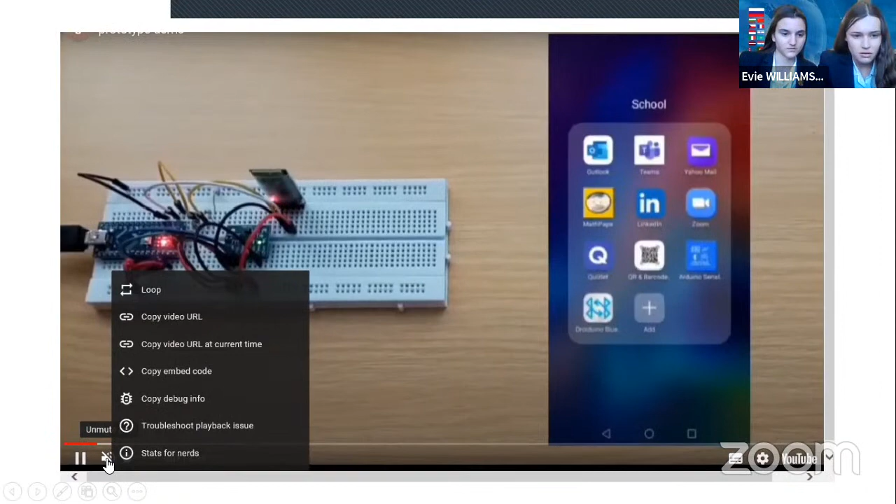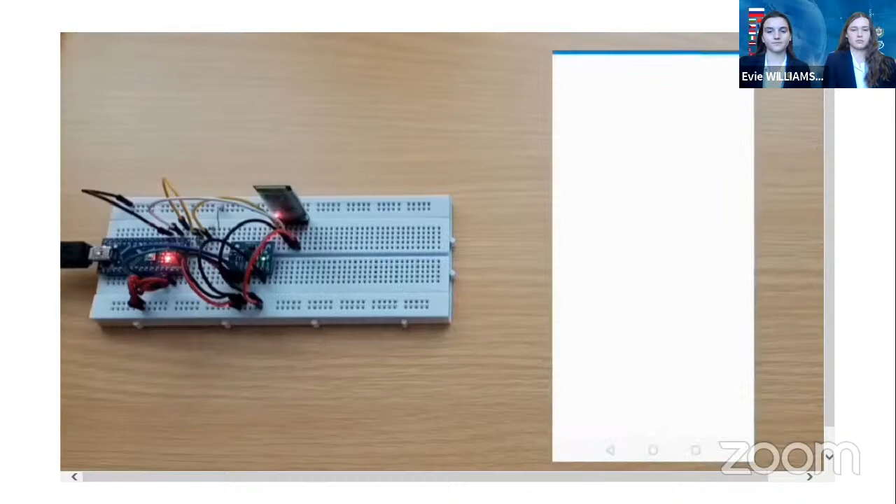Hello everyone, welcome to the video demonstration of the prototype. This right here is the Arduino. This over here is the hardware. This over here is the HC05 Bluetooth module. So we're going to open the app now. At the top right there's a button that says connect. Connect to the Bluetooth module.

Let's say the horse would be jumping at 1.1 meters. The value on the right is the calculated acceleration that the horse can take when jumping at this height, and the 9.81 is the acceleration on Earth.

The app is ready to record movement and acceleration. So if I take this and move it, the value will change. There we go. If I go a bit more... Now, as you can see, the light bulb has gone magenta, which means the rider has been alerted that the horse has taken too much force. Thank you.

So this is obviously a prototype and simply the foundations and proof of concept. However, if we were to make a finished product, the app would work in terms of force instead of acceleration, using the simple equation force equals mass times acceleration. This is because the mass of the horse, mass of rider and tack, which is the stuff that's on the horse, may vary, and obviously the force will be greater if there's more mass.

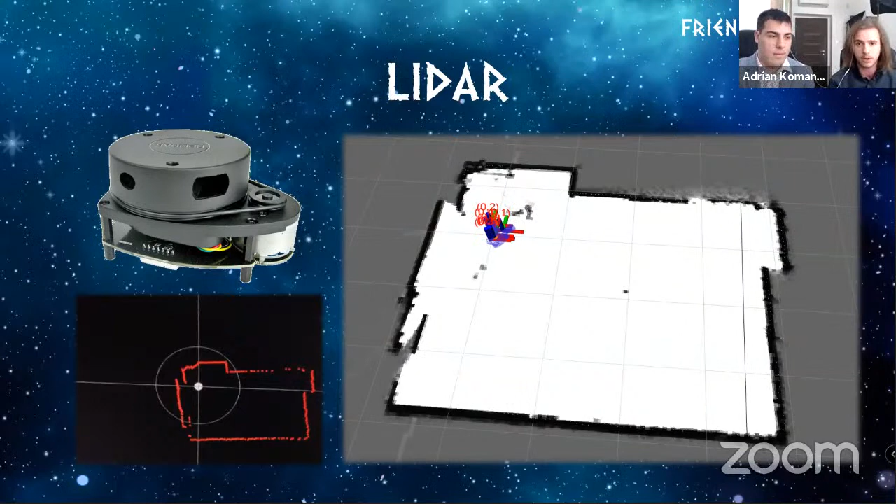The picture on the right resembles the mapping of the terrain of the same room. However, this picture was made in the program RViz, which allows us to store the mapped surroundings and even project the path the robot should use if needed. We tested our system in a real environment, as you can clearly see in the next video.

The robot's field of view is set to 60 degrees in front of it, meaning it represents 30 degrees on each side. Objects that it detects should be less than 30 centimeters close for the robot to respond to them.

The robot chooses a direction opposite of the detected object to avoid it. As you can see, we put several obstacles in the way of the robot and changed them to represent the differentiations and its adaptation to the terrain.

As we already said, the essential factor for the accuracy of the LiDAR is the surface area of the object, and the flower pots that are glossy black have the worst quality of surface to reflect the laser back to its main board. As you can see, the robot can withstand these difficulties - the glossy black surface caused a bit of irregularity, but it could still withstand it.

The next problem was the problematic terrain. After further testing, we decided to prepare our robot for sudden changes in terrain below, such as stairs. The current design of the robot does not allow it to handle such problematic terrain.

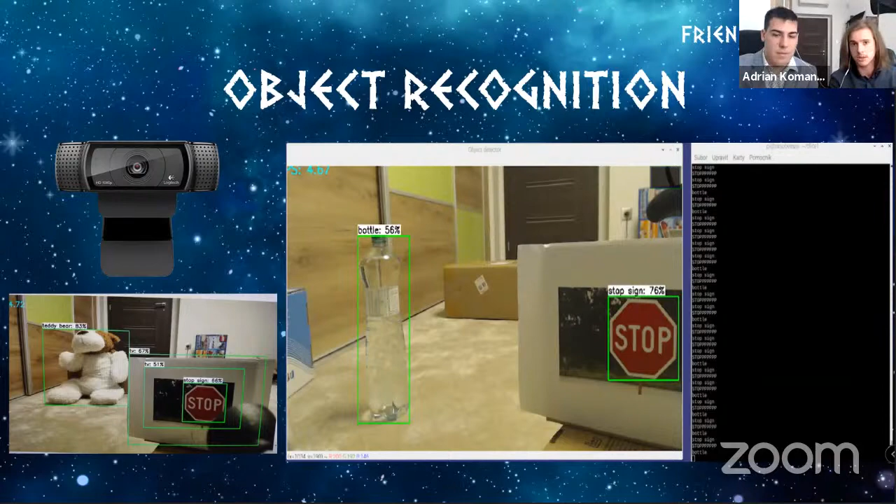The first thing we taught our robot was a human, which is the most important thing to recognize. The robot must cause no harm to people, so it avoids them. When it sees a human, it asks for identification. However, it doesn't really care much, so it chooses a completely different direction to avoid any kind of person. The cables are only there to display how the robot sees as an output, but they are not necessary for normal function of the robot.

A stop sign is a basic element in transport, so it was necessary to teach the robot to react properly. When the robot recognizes the stop sign, it stops for a moment and continues on its way. It adds a little comment and then continues.

The last thing we taught our robot was a teddy bear. This is just a reminder that our robot is not just a cold piece of plastic, so we decided to have it detect and befriend teddy bear animals. It does a little dance, greets its new friend, and then continues on its path, as you can clearly see - it danced a bit and will continue as soon as possible.

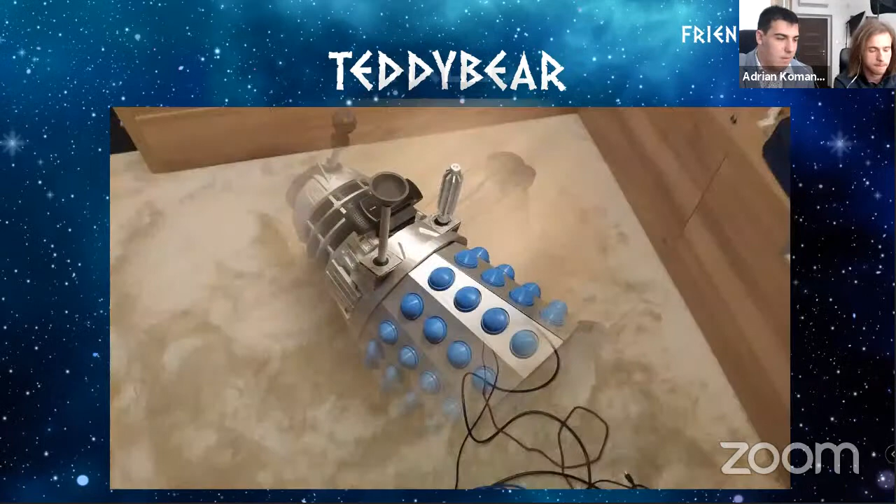In conclusion, our system for autonomous robot operation in its current body can find use, for example, as a piece of teaching equipment for understanding the functionality of LiDAR and terrain mapping, and as a demonstration of one of the basic elements of AI, which is AI vision. Thanks to its eye-catching design, it has the power to attract the attention of students, who may develop an interest in these topics. However, its further use could be more complex, when the whole system can be transferred to another body or vehicle, for example, and still be capable of normal function. The complete robot in its current body weighs about 3 kilograms, is 45 centimeters high, 30 centimeters long, and 25 centimeters wide.

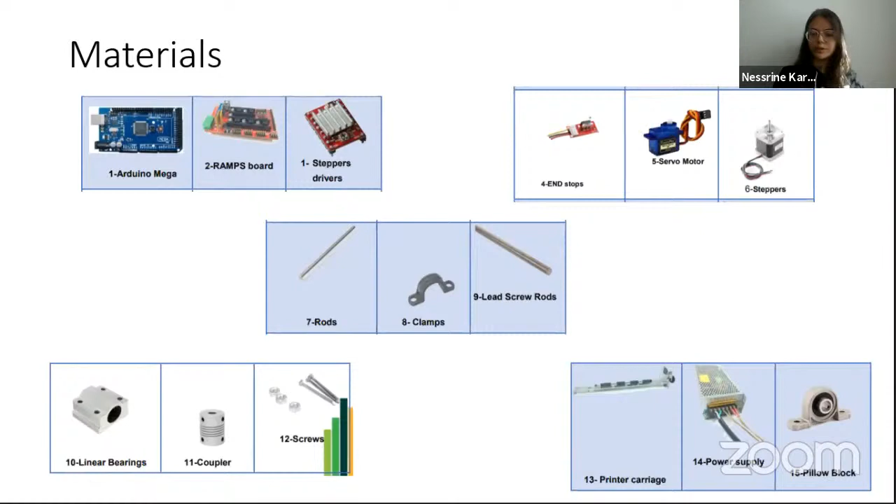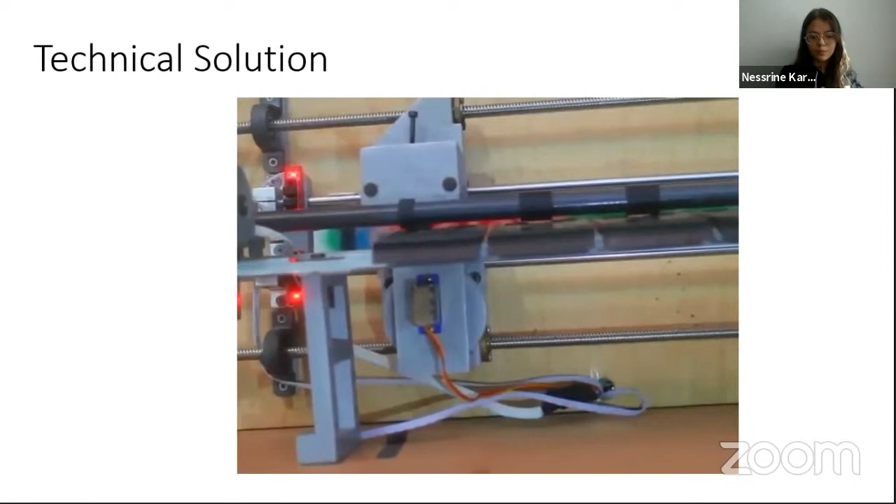Our printer is based on a normal printer mechanism. It contains two axes, X and Y. The servo motor turns with a specific degree because the method of writing varies from letter to letter. The form of this piece makes the Braille needle descend to print characters. The code works using the Python programming language.

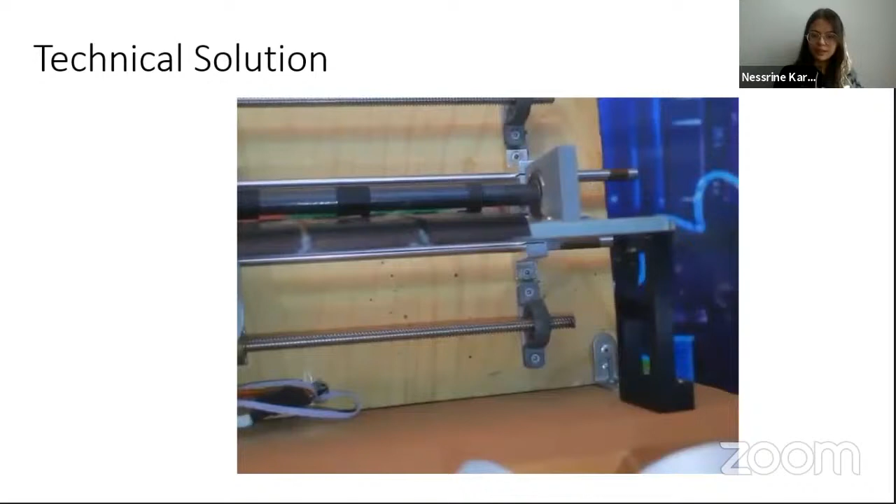We have visited some primary schools for the blind in our country. They used our printer and they were impressed, and they preferred to use it.

Our printer is a fully automatic Braille printer. It will help blind people write anything they want just by speaking. It's also compatible with any language — English, French, Spanish, Arabic, and even Chinese — thanks to Google Translate services and the API translator.

To conclude, we have successfully created an efficient Braille printer that can give blind people the ability to write in Braille easily. We can conclude that the system is extremely beneficial and a noticeable improvement over its traditional counterpart. Giving blind people this tool will greatly reduce their effort for communication and make them free to write and read without the help of anybody. So our printer is a dream for visually impaired people.

As for future work, one particular feature we're going to focus on is the ability to work on face and object recognition as a scanner, to make visually impaired people able to read the name of an object and know people's faces like anyone else. Thank you for your attention.

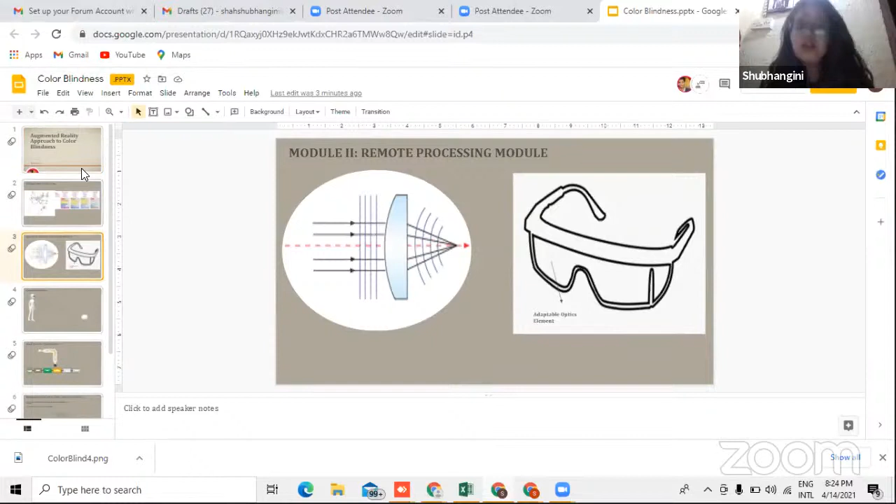Basically, my project has three constituent modules: the data repository module, the processing module, and finally the output module. First is the data repository module. The light source is configured so that direct light falls into the human's eyes. Adaptable optics elements are placed between the display screen and the light source. These adaptable elements act as the calculating instrument for the distortion caused by the deficiency in human eyes.

When the light source reaches the screen, basically the beam of light causes the particles to move, and that is why, coming back to the screen, it comes in the form of a wave, which is stored as data in the data repository.

Next we have the remote processing module. This module uses the data from the repository module to create an opposite wavefront, which is applied to the deformable mirror. This mirror consists of a very thin layer of flexible metal with numerous small magnets attached to it, so that when the control layer is attached, they move up and down, which helps form the shape of the deformable mirror.

This mirror also has the shape of the opposite wavefront. So when light from the source strikes the surface, it evens it into a proper image, like a plane surface, resulting in a clear image.

Lastly, the output module. For the correct mirror shape, a more sophisticated wavefront sensor is employed. A beam splitter is placed in the optical path and used to reflect part of the light into a wavefront sensor. Information derived from this contrast helps correct the wavefront distortion, and this system operates in a closed loop. So as soon as the light reaches the frame, all three modules work interrelatedly, and at the end, with the emission spectrum, the lights are differentiated, and the human eye can see the corrected image. That sums up the project.